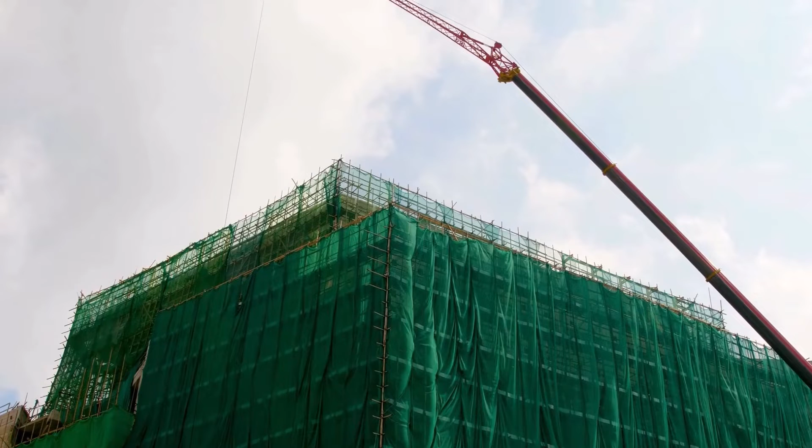My name is Shahrul Daniel bin Sahid, and I am the Chief Operating Officer for our company, Success Construction Sendirian Berhad. I will be presenting Task 1A, the formation and registration of the company. Our company has been registered under Suruhanjaya Syarikat Malaysia (SSM), Unit Pendaftaran Kontraktor dan Juru Perunding (UPKJ), Construction Industry Development Board (CIDB), Sijil Perolehan Kerja Kerajaan (SPKK), Kumpulan Wang Simpanan Pekerja (KWSP), Ministry of Finance (MOF), Lembaga Hasil Dalam Negeri (LHDN), and Pertubuhan Keselamatan Sosial (PERKESO/SOCSO). Our company also has a rental agreement.

I am Azia Asmira, and I will talk about Task 1B, preparation of the company profile.

Success Construction Sendirian Berhad was established in 2017 in Malaysia, providing the best service for construction management. The company has successfully met customer demand in the private and public sectors since its inception. Success Construction was registered as a Bumiputera company specializing in construction and engineering works. The aim is to involve more construction work and increase the number of people in the construction field joining related activities. Success Construction Group has been built and developed by an experienced team, each with their own specialty, ensuring that all activities and occupations are carried out smoothly and successfully.

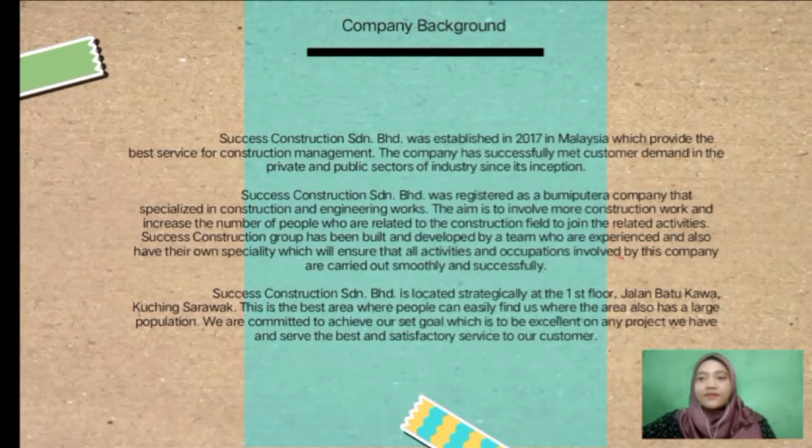Success Construction Sendirian Berhad is located strategically on the first floor, Jalan Batu Kawa, Kuching, Sarawak. This is the best area for people to easily find us, as it has a large population. We are committed to achieving our set goal, which is to be excellent in any project we undertake and to serve the best and most satisfactory service to our customers.

Success Construction is led by Nurhana Amira Muhammad Fitrillah as Chief Executive Officer, Intan Syafizati binti Abdul Rahman as Director, Shahrul Daniel bin Sahid as Chief Operating Officer, followed by the other Directors.

First is the Project Director, Azia Asmira binti Samsuni; Muhammad Hanif bin Zinal as Finance Director; Nurul Hafizah binti Haji Sulaiman as Administrative Director; and lastly, Nur Atika binti Japlun as Contract Director.

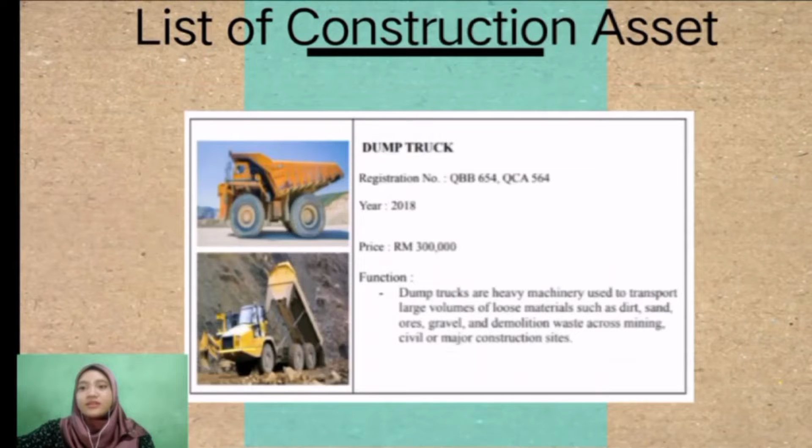This is the list of construction assets: excavator, dump truck, tower crane, road roller, concrete mixer, crane, forklift, bulldozer, skid steer loader, and front and backhoe loader.

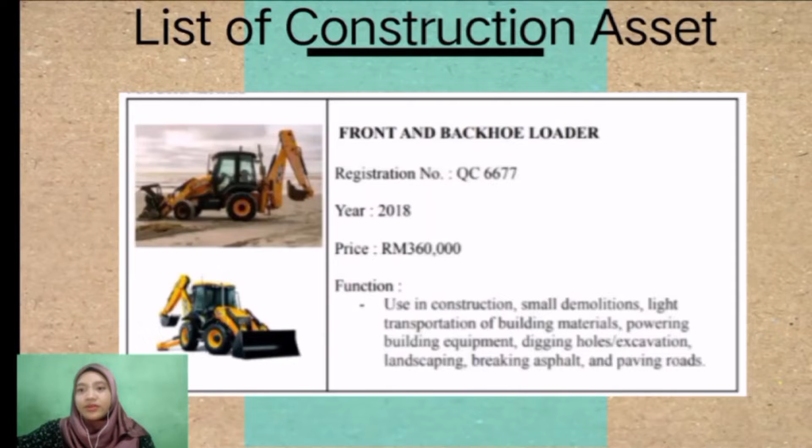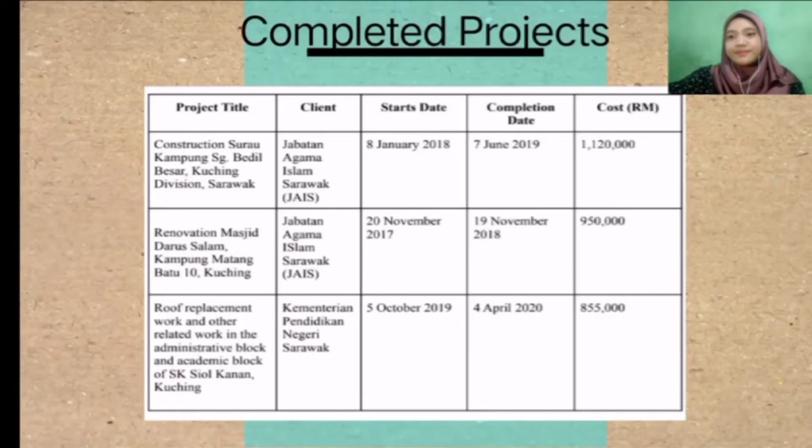Assalamualaikum. My name is Nurhana Amira binti Muhammad Fitrillah, and I am the CEO of Success Construction Sendirian Berhad. I am going to present Task 2A, which is the tender document.

Next is the notice of tender closing date, which is on 19 May 2022 before 12 p.m.

The period of contract is 12 months, and the contract sum is 4,776,833.64.

For the summary of tender, firstly, the building work sum that consists of general excavation, concreter, roofer, carpenter, jointer and ironmongery, steel and iron work, plaster and pavior, plumber, painter, and external work have been added to generate the total sum.

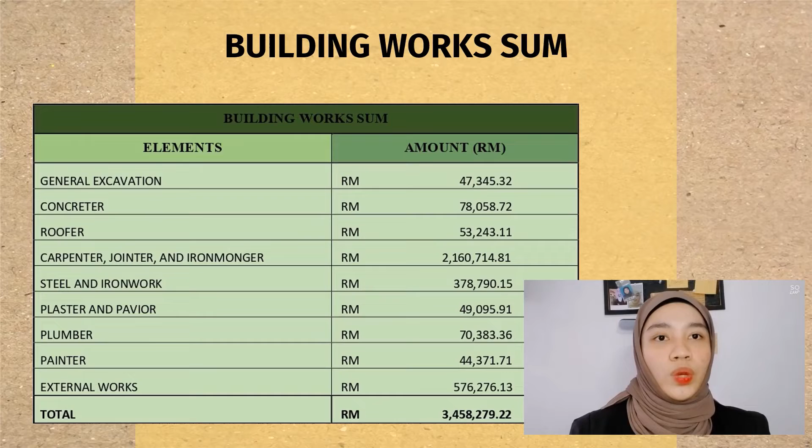The total for the building work sum is 3,458,279.22. The total for the general sum is 4,776,833.64.

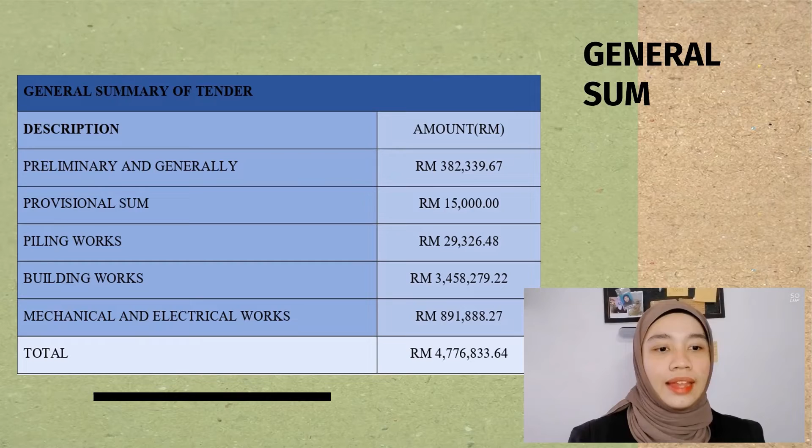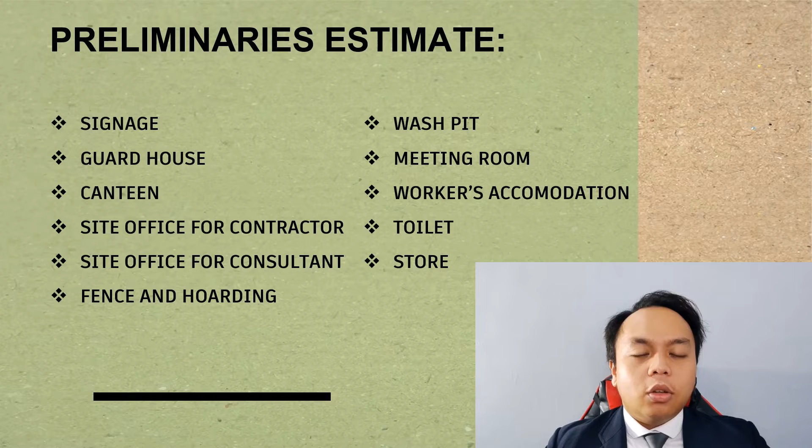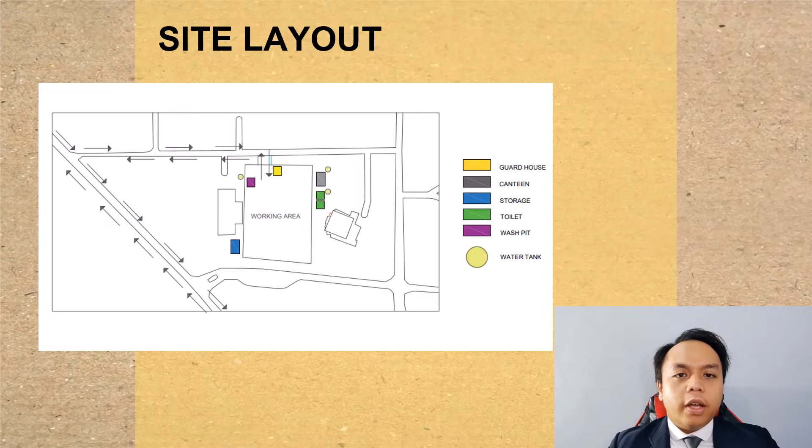All the prices are based on the latest and current price. That is all my presentation on task 2B. Thank you.

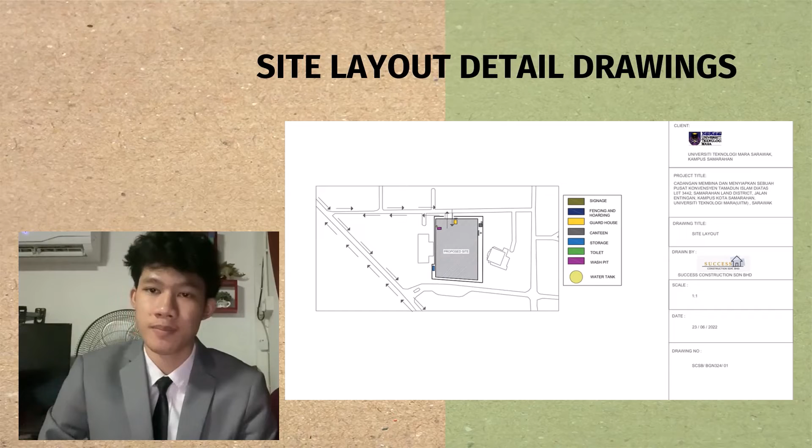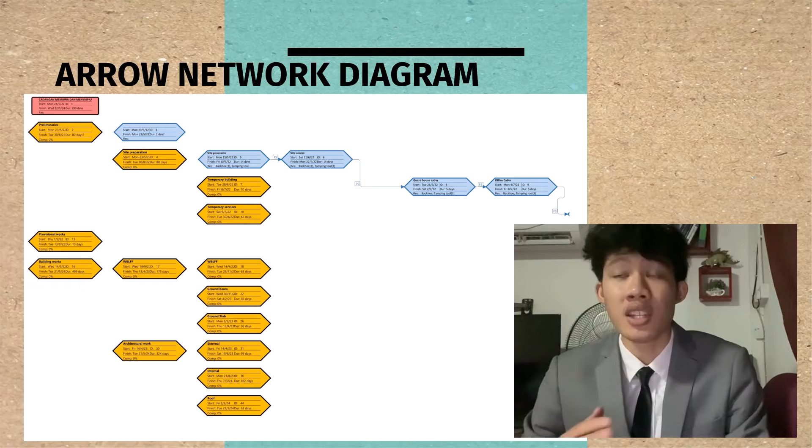As for the arrow network diagram, it is mainly focusing on determining the optimal sequence of events and activities. It also shows and indicates the durations in every activity and the total duration of all activities for the completion of the project.

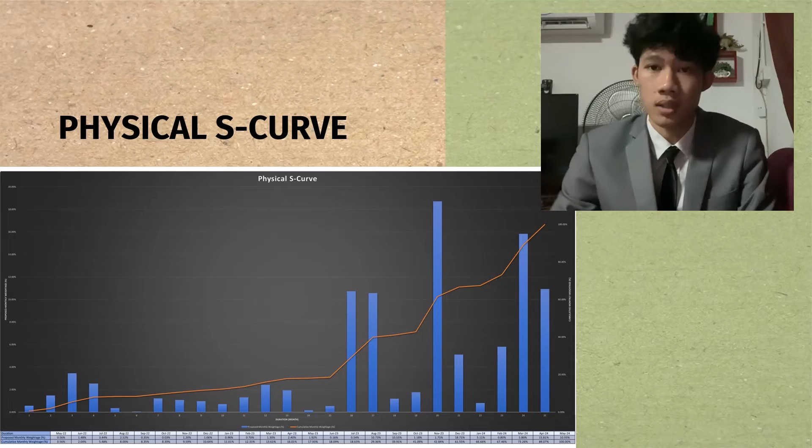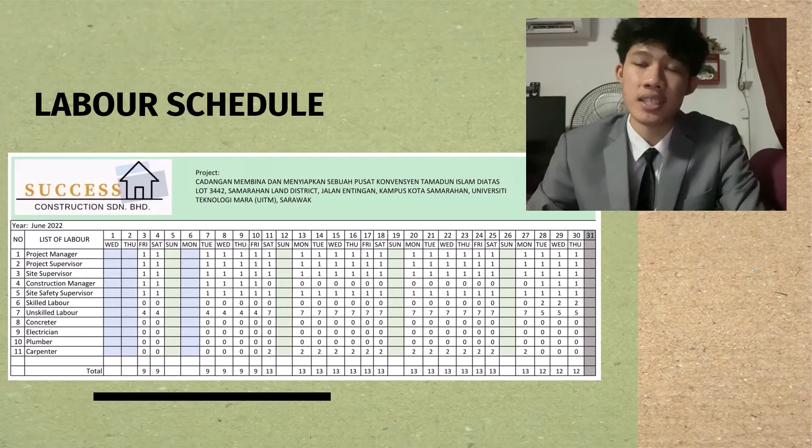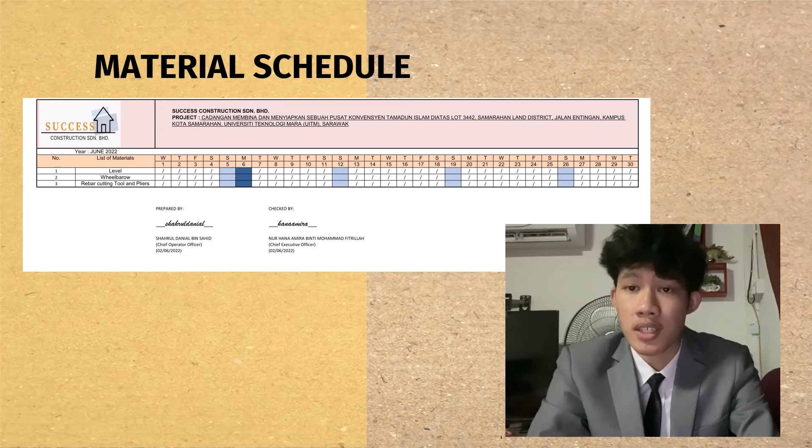Next is the material schedule. This is one of the tables from the material schedule. It shows that the materials are used every day on working days only, except Sunday, because Sunday is the day they're not supposed to be working.

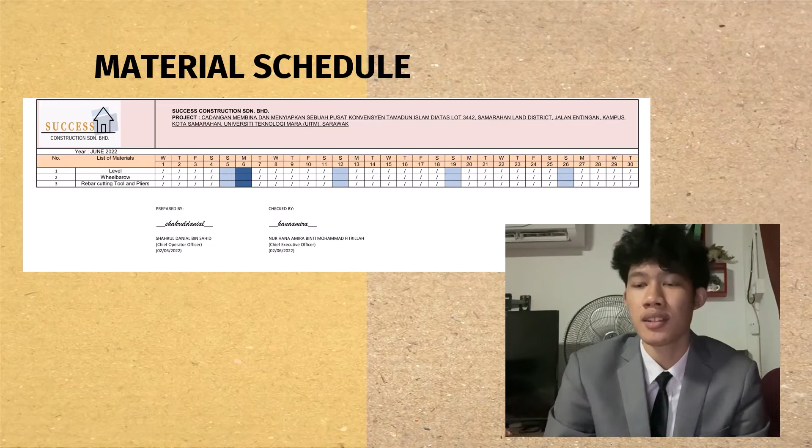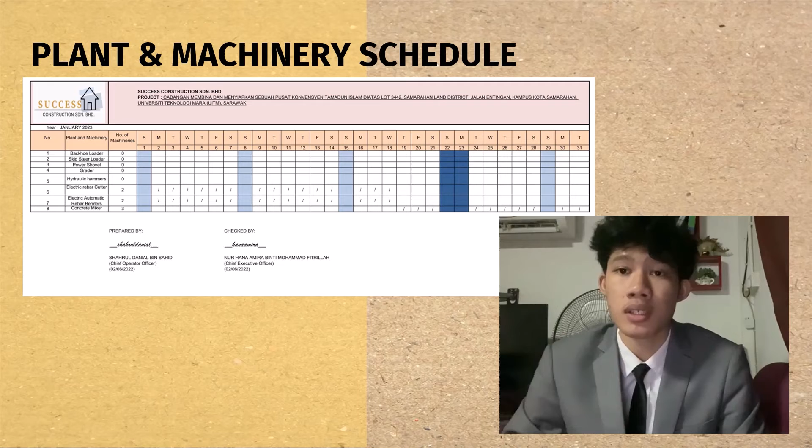And the next one again is the plant and machinery schedule. By referring to one of the tables in the plant and machinery schedule, the machineries were used every day on working days, but some of them were used according to what works were in progress.

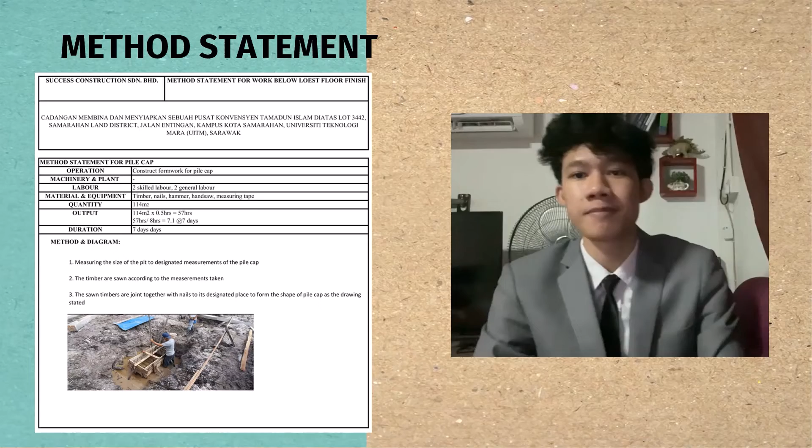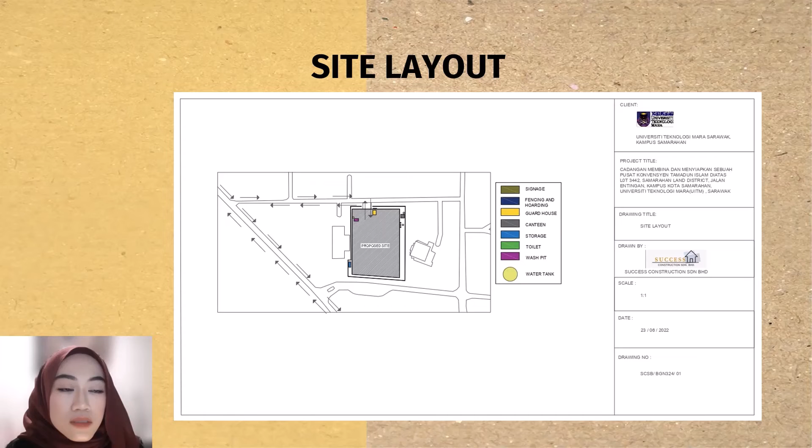Number 3 is site safety implementation plan. This is the site layout. As you can see, we have the arrow from the entrance, and you can see the signage, fencing and hoarding, the guardhouse in front there, and then the canteen for the workers, storage, toilet, wash pit, and water tank.

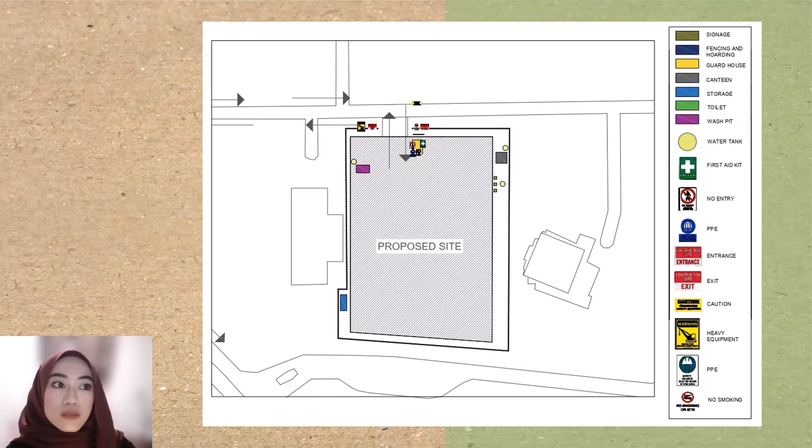This is where we put all of the safety signage at our site. We have 10 safety signages at our site.

First is to show the location of first aid. The second one is to prohibit people not related to the construction site from entering. The third one is to use the fluorescent safety vest in the area. The fourth one is to show the entrance to the construction site. The fifth is to show the exit from the construction site. And the sixth is to show the area is under construction.

Seventh is precaution on the heavy equipment that is working.

Number 8: safety helmet must be worn before entering the area. Number 9: safety shoes need to be worn before entering the construction site. And the last one: smoking is not allowed at the construction site.

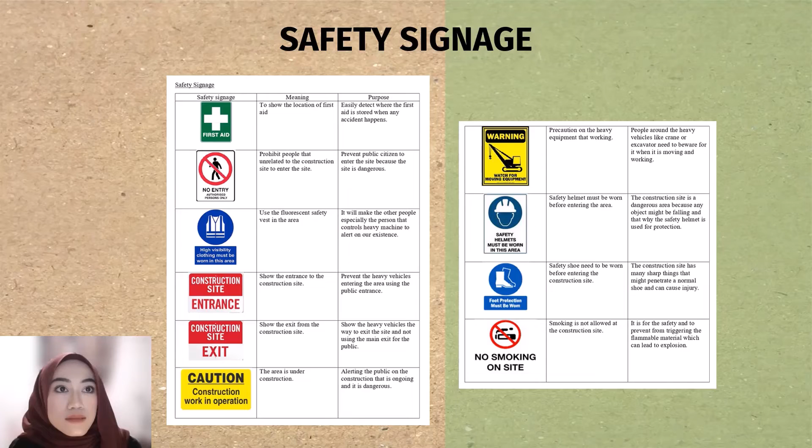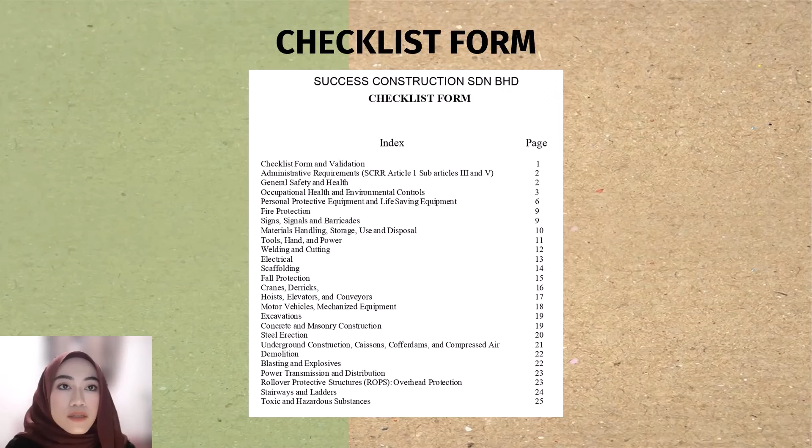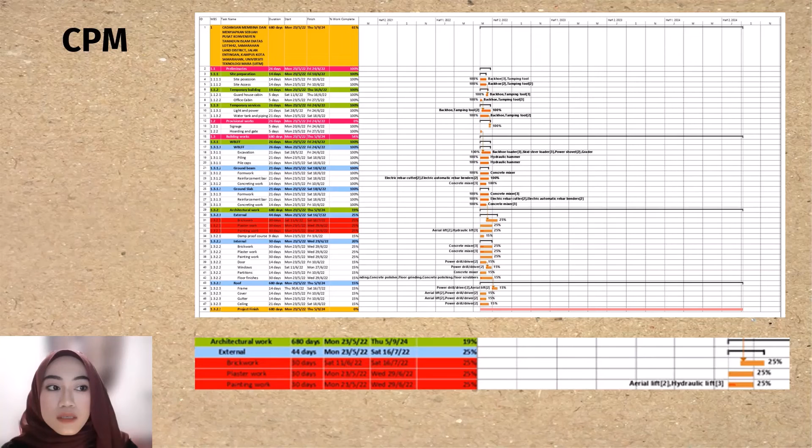This is the CPM. As you can see, the activities highlighted in red are the ones that have been delayed, which are brickwork, plastering work, and painting work, due to unexpected incidents for 90 days.

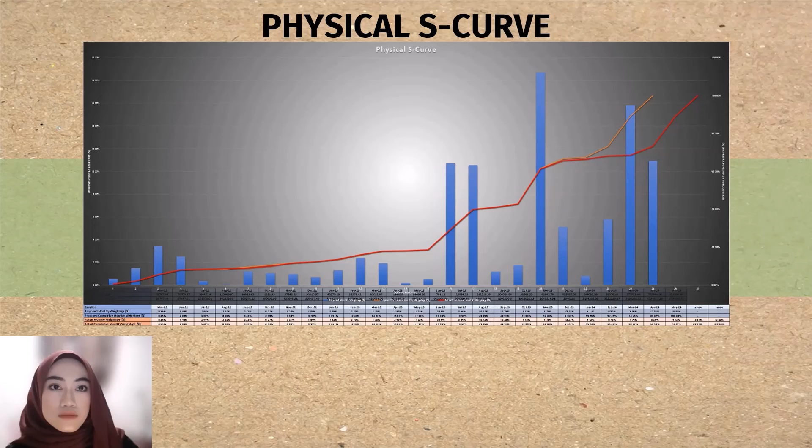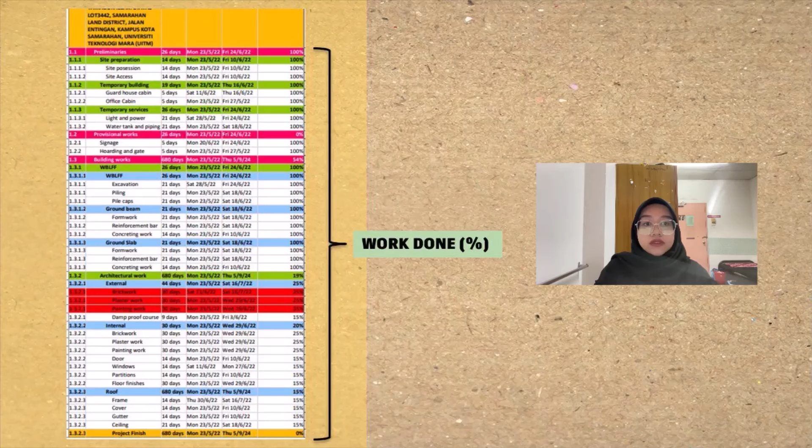Here we can clearly see the actual progress and how much work has already been done throughout the 12 months. We can see that preliminary works is 100% finished, and building works is halfway through, which is 54% finished. This means the overall project has already finished 61% by the 12th month.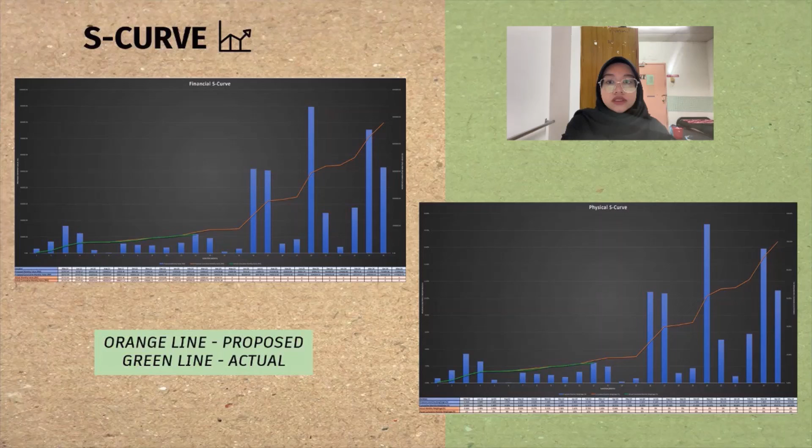As for variation order, it needs to come with a submission letter and a list of the variation order. For this project, there are 5 variation orders in total, which are changes of door, addition of tiles, changes of windows, changes of files, and changes of finishes.

Next is the quality assurance and control report, where we have 6 inspections in total: weekly site inspection, cube test inspection, inspection before concreting, reinforcement inspection, brick inspection, and structural inspection.

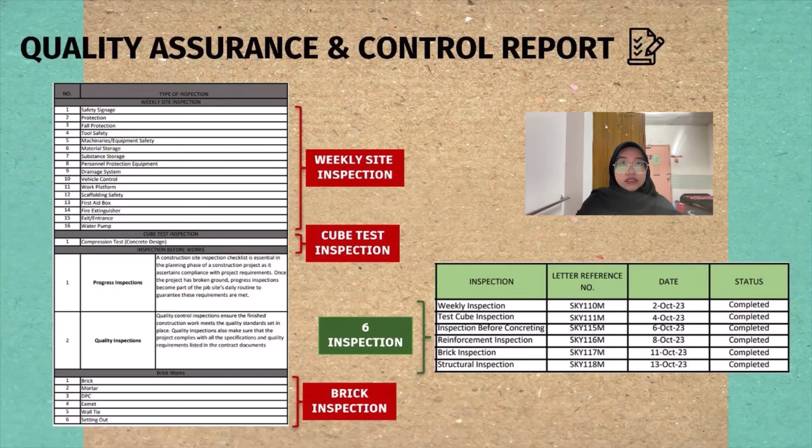For the safety and health report, there are 6 safety activities that have been done, which are safety off-site, first aid kit, safety measures, worksite safety, anti-pollution measures, and site fire prevention and firefighting facilities. There is also an accident report on site, which includes minor injury, possible danger exposure, burn, exposed chemicals, and more.